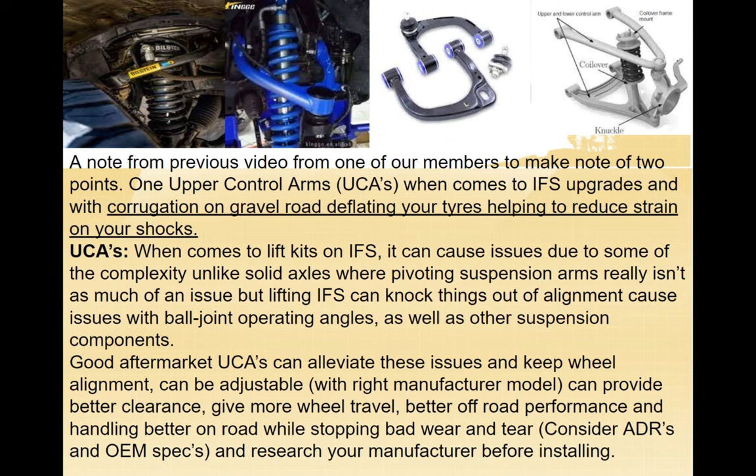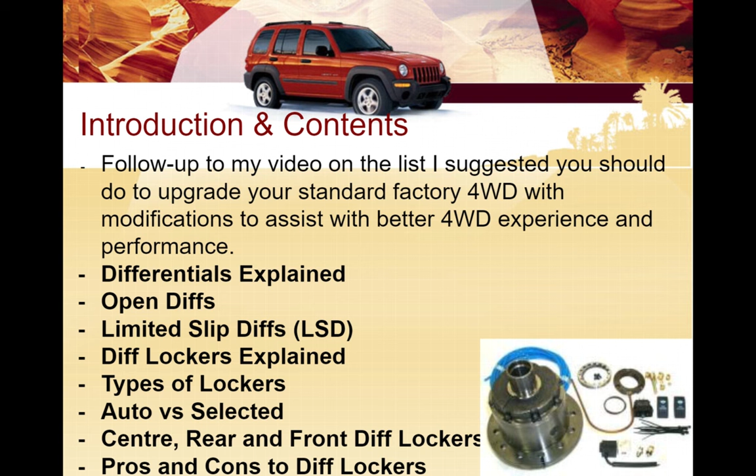So moving on to our topic for today, which is diffs. We're going to cover the basics first, then move into diff lockers, some types and variations, how they work, and pros and cons.

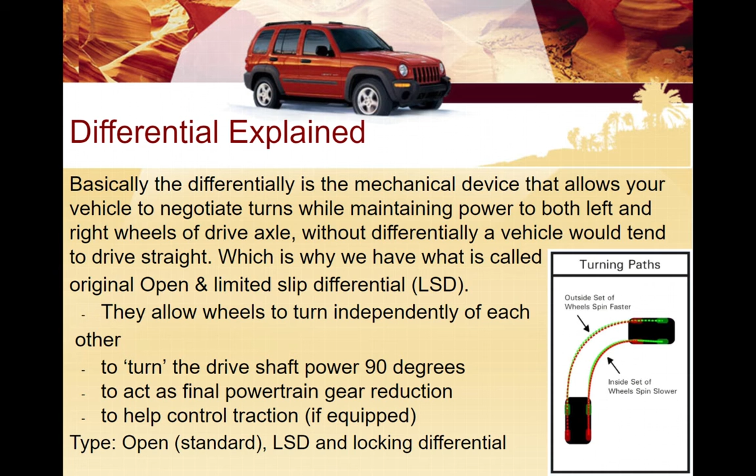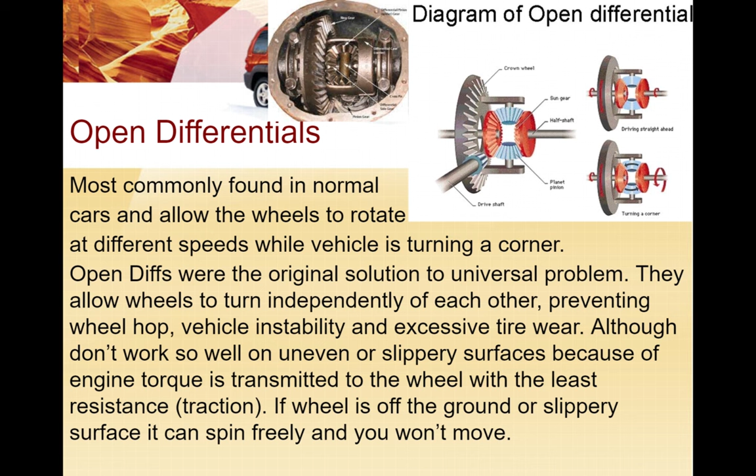Open diffs are most commonly found in normal vehicles. They allow the wheels to rotate at different speeds when cornering. They were the original solution to that problem, allowing those wheels to turn independently. They prevent wheel hop, vehicle instability, and excessive tyre wear that would happen if you didn't have one. Although they don't work as well on uneven or slippery surfaces because engine torque is transmitted basically to the wheel with the least resistance, i.e. the one with the least traction. So if the wheel is off the ground or on a slippery surface, it will just continue to spin freely and you won't move at all.

Limited slip diffs, LSDs, utilize some means of partially reducing, but not totally eliminating, that wheel spin. It's an improvement on the open system. They use varying methods to transfer torque to the wheel with traction, while limiting the slip on the wheel with the least traction.

So it's what we call torque sensing. They're like the open system where the wheels can operate and rotate at different speeds. However, torque's not always balanced between the wheels, so this allows the wheel with traction to receive more torque to keep it moving. It's considered the diff is biased towards torque, so it gives the torque to the one with the higher traction, and the amount of torque variation the diff can shift between the wheels.

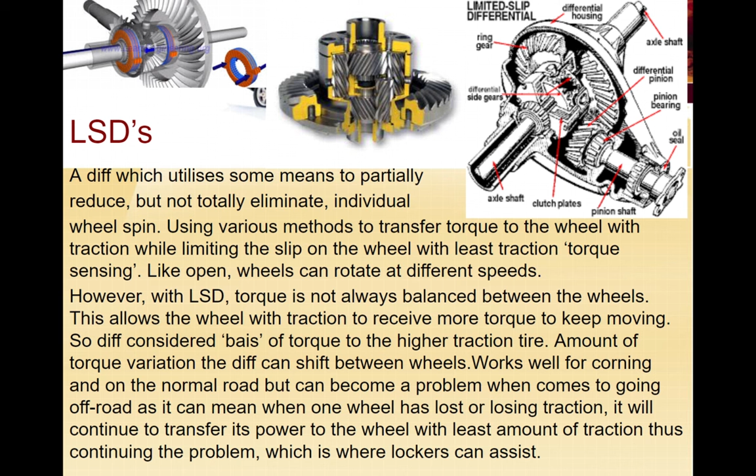It works well for cornering and on normal roads, but can become a problem when you come off-road, if one wheel loses traction altogether. It will continue to transfer its power to that wheel because it thinks there's a lack of traction. It needs to continue that spin, and thus it just perpetuates the problem and you won't go anywhere. One wheel will spin much faster than the other, so we don't want that to happen.

So that's where lockers come into it. Lockers, in simple terms, lock the axles mechanically together, forcing traction between both wheels equally, so they rotate at the same speed. And they're supposed to always distribute that equal amount of torque to both wheels. I put that in underlining because always and equal is how it should be. Whether it happens or not all the time can vary in my experience.

So there is a difference between left and right diff - the RPM difference between right and left is always proportional. So when you're off-roading, it's great if one wheel is either off the ground or lacks traction on one side. The locker will still allow traction to go through both wheels equally, so that the wheel that does have traction can continue to maneuver and move you forward.

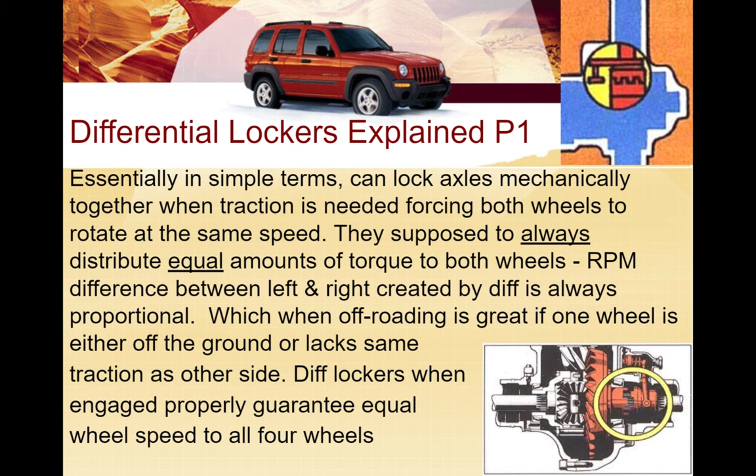So a central one, gone too far - a central one means it transfers 50 to the front and 50 to the rear. I think I have another slide that covers that in a bit, so I won't go too much more into that.

But it's best to learn about your lockers on your car before you go around using it, because improper use of lockers fitted from the factory can actually affect your vehicle or cause it some damage, particularly if you're on the road, and can make handling or maneuvering difficult.

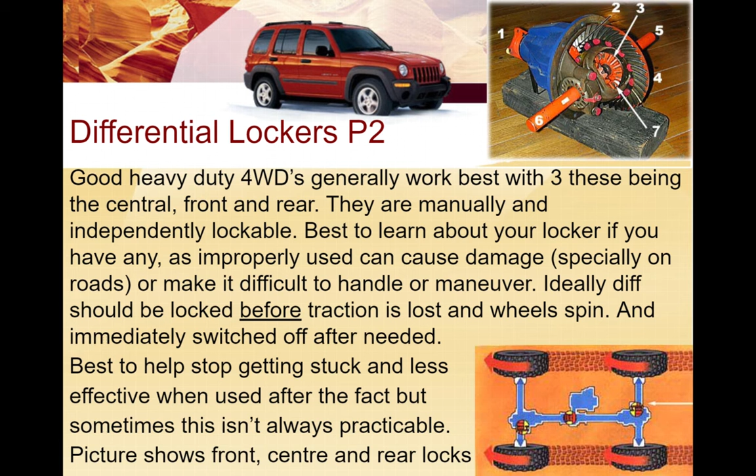Ideally, diffs should be locked before traction is lost and you have a lot of wheel spin, and then immediately switched off after you finish with it. That's best practice, but it doesn't always happen that way. So sometimes you might need to lock it after the fact, but it's not always ideal. But if you know you're going to go up a steep slope where traction might be needed, it's best to turn it on rather than not have it on.

So as I mentioned, great for off-roading. When you're lacking traction on one wheel, you still got traction on the other. They guarantee that equal wheel speed.

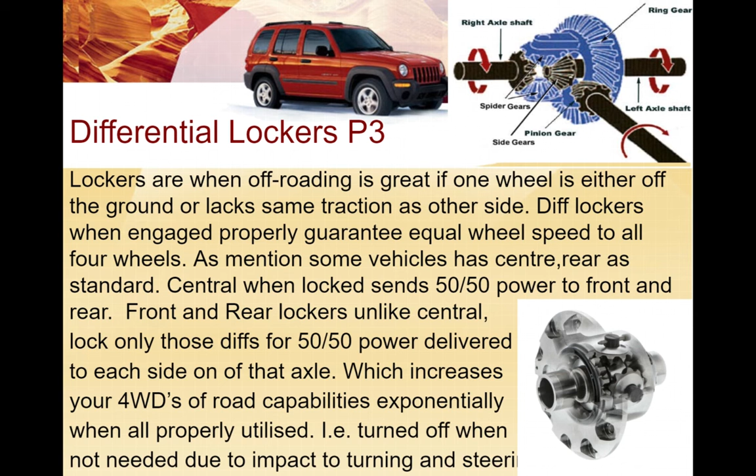As mentioned, with the central one, it sends 50% to the front, 50% to the rear. And if you have front and rear lockers, it sends 50% to either end of the axle, so 50% would go to the left and 50% would go to the right wheel, and same with the front. This increases your four-wheel drive capacity exponentially when it's utilized correctly and turned off when not needed, so it doesn't impact your turning or your steering.

So a locker can also be manual or automatic. Manuals would be like the ARB air lockers or electromagnetic types of lockers, and the automatics can be ones like NoSpin, Detroit Locker, or the Lokka brand. I don't see a lot of the automatic versions from my experience, but they're out there.

There's a lot of cons though with them. Driver-selectable lockers use a push button, much like my Triton has one, where you utilize an electromagnetic assembly to actuate the engagement collar, which in turn locks the axle.

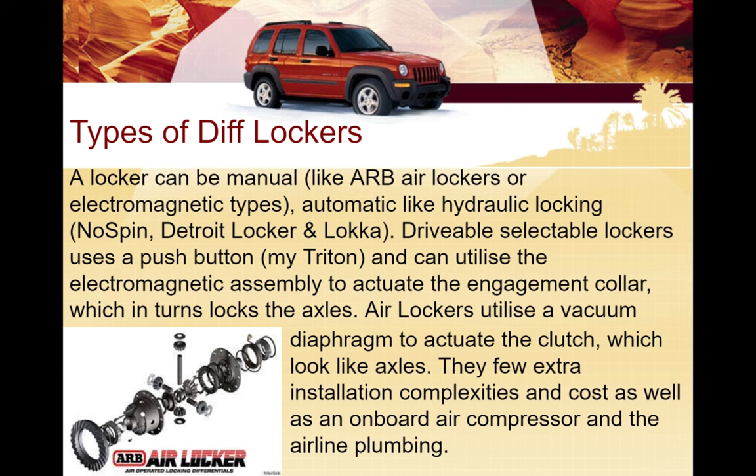Air lockers use a vacuum diaphragm that actuates the clutch which locks the axles - which looks like the axles and locks them. There are a few installation complexities that go along with this, as well as the cost of having an onboard air compressor and airline plumbing put in to make this effective. So it does cost a bit to get them implemented.

Automatic ones require no driver input at all, and they lock together when torque's applied.

Varying brands work differently. For example, the MLocker operates like an open diff, but it locks upon loss of traction when under roughly 45 kilometers, and then unlocks again when conditions are suitable. The Detroit locker version is normally locked, but automatically unlocks during turns and relocks again when conditions allow.

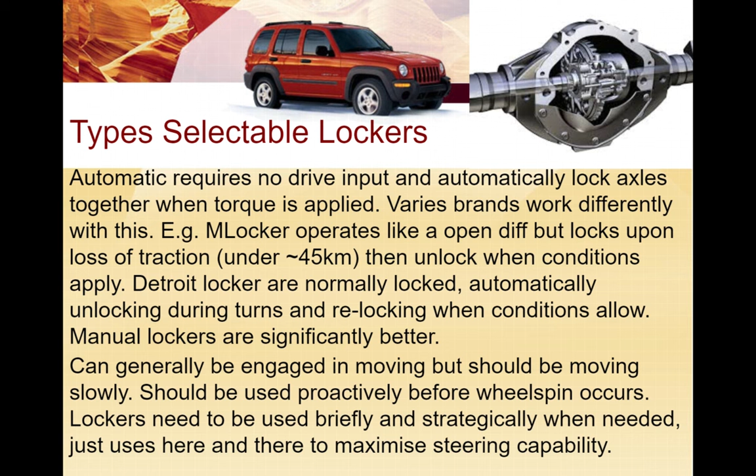In my opinion, manual lockers are significantly better. They can generally be engaged while you're moving, as long as you're moving slowly. They should be used proactively, before wheel spin or situations like that occur, and preferably used briefly and strategically when needed, so you can maximize your steering capability and not wear out your system.

Some advantages: you get that instant traction capability, can be turned on and off as needed, that being the selectable ones. If you went with air lockers, you get compressed air on board as part of that system, which you can use for other means. You can lock one or both independently, so you don't have to lock your rear by itself, your front by itself, both of them, or the central and all three.

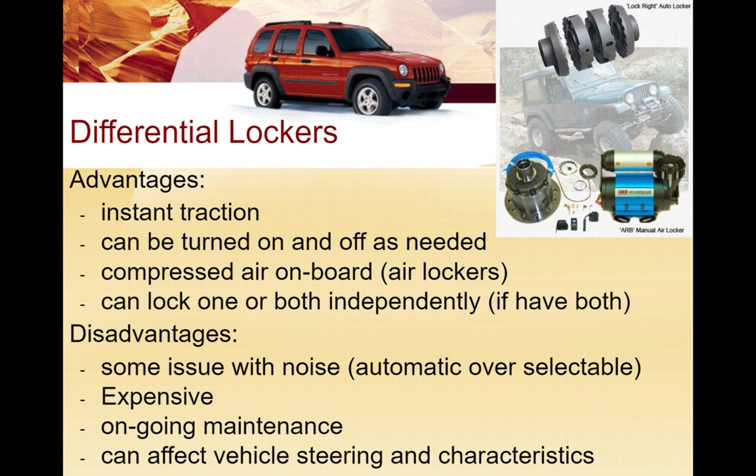Some disadvantages: there's noise issues. That's generally the automatics, I've never noticed it with the selectable. They're very expensive though, and they do require ongoing maintenance, and they can affect your vehicle's steering characteristics.

Front and rear diff lockers can depend on the type of vehicle you have and what equipment's already installed on it as to what you choose to do first, or if at all.

If you've got a factory rear locker, there's no point bothering putting one in. But if you have a factory open diff, it's best to focus on a rear diff locker first. If you've got a limited slip diff in the back, then you're best focused on a front differential locker, because it's more suitable for the diverse range of situations until you can perhaps get a rear diff locker.

The rear diff locker is the better way to go for value for money, as you get more flex and more contact with the ground. Fronts are great when it comes to climbing hills and pulling yourself out of big ditches or over rock ledges. But as mentioned, the con with it is that restriction with steering ability, so you'll have to turn it off as soon as you finish getting through whatever obstacle you have.

Having all three of those increases your four-wheel drive capabilities. I mean, three is front, rear, and central, increasing your four-wheel drive capabilities quite substantially.

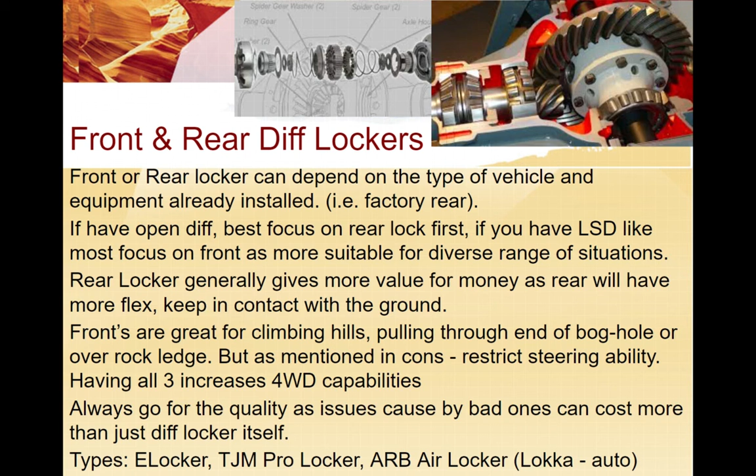I always go for quality, as issues can be caused if you choose a bad one. You can actually make the problem worse, and it can end up costing you more than the diff locker itself if you get a bad one, brand-wise. Some of the brand names out there are like the E-Locker, TJM Pro Locker, ARB's Air Locker, and the Lokka automatic version.

So in conclusion, I've smashed this out as quick as I can, so I didn't keep it too long, but hopefully it gives you a good understanding of some diffs, some basic functions and main types that are important to focus on when you're looking at your four-wheel drive, and the way that lockers work and how great they can be to your usage when it comes to four-wheel driving when used correctly, and how they can really help you get out of a lot of situations by utilizing these if you have them.

Get an idea of the differences between the types, between front, rear, and central, what benefits and disadvantages you get out of them. Same with automatic and manual diffs, the advantages and disadvantages with that, and hopefully this helps clarify diff lockers in general and gives you something to consider when it comes to looking at your vehicle and deciding whether you need one put in and where to put one in.

In my personal opinion, I've found having a rear diff locker has been really helpful for me in a number of scenarios. So getting a front diff locker is on my agenda to have done soon whenever the funds are available, because they're not that cheap. It's a big list of things to have added to my vehicle, but this is one of them.